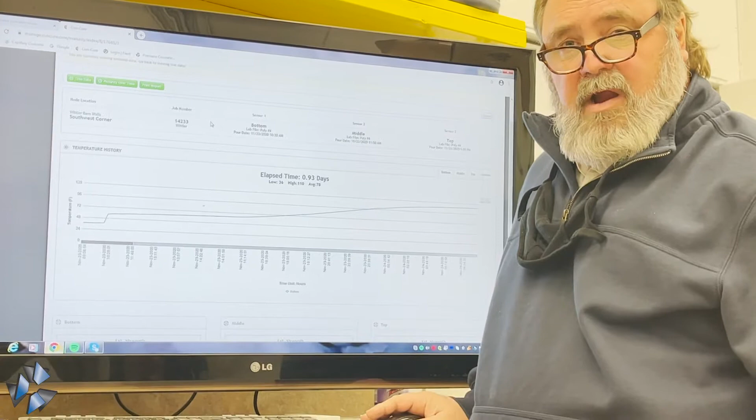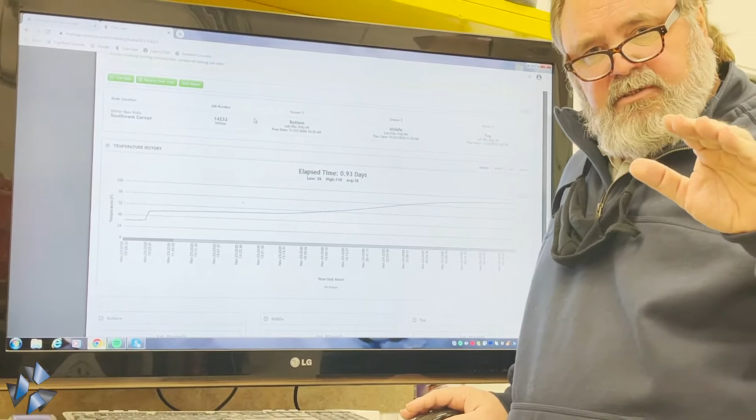Hi, welcome back. Today is the day where we break the 1-day or the 24-hour breaks, comparing what we get in the TruMatch box, which is our curing box that has a water bath in it, and it is curing the cylinders 12 miles away, mind you, at the exact same temperatures that are in the wall for the top of the wall. As you can see here, we have 3 cylinders, 3 sensors in 3 different locations.

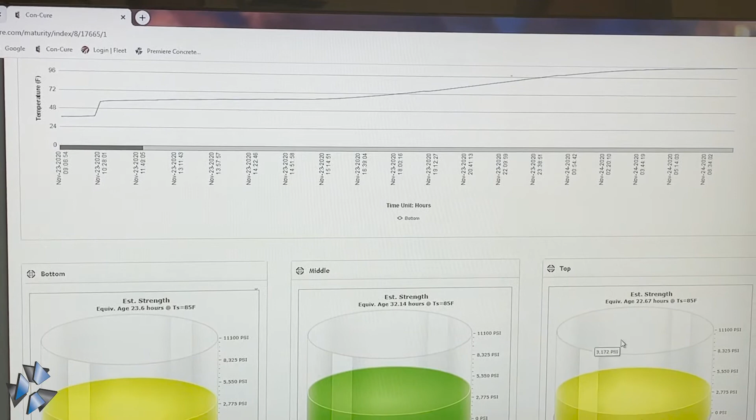We got the bottom of the wall, we got the middle of the wall, and we have the top of the wall. Now, we selected the top of the wall, as I said, to be conservative. There's 2 reasons that we picked that. Number one is that the concrete at the top of the wall is anywhere from 2 to 2.5 hours younger than the concrete at the bottom of the wall. So we know that the younger concrete is going to be the weakest.

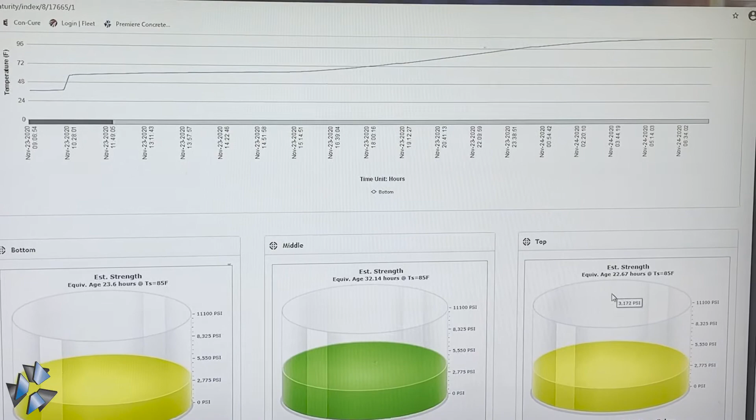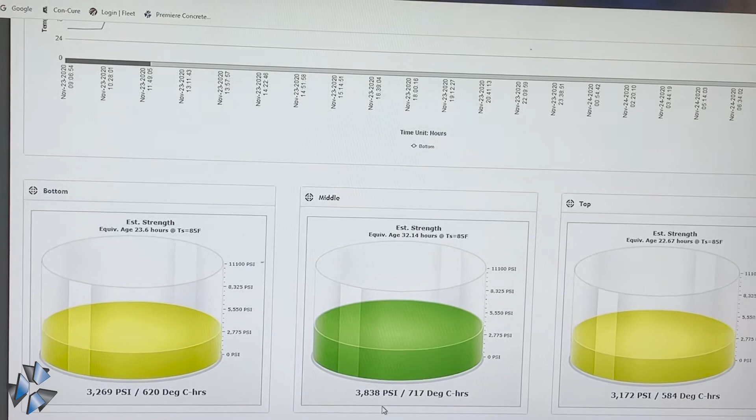The other part is that we believed that we would have the most heat loss out the top of the wall. Okay, so if you have more heat loss, you're going to have lower strengths as well. And that kind of is indicative if you look right here in the middle of the wall. You see our cylinder's green, which means we've already reached our design strength, as predicted by the maturity curve. The maturity curve estimates that part of the wall is going to be 3833 or 3838. The reason for that is because currently this section of the wall is curing at 128 degrees. So kind of interesting stuff.

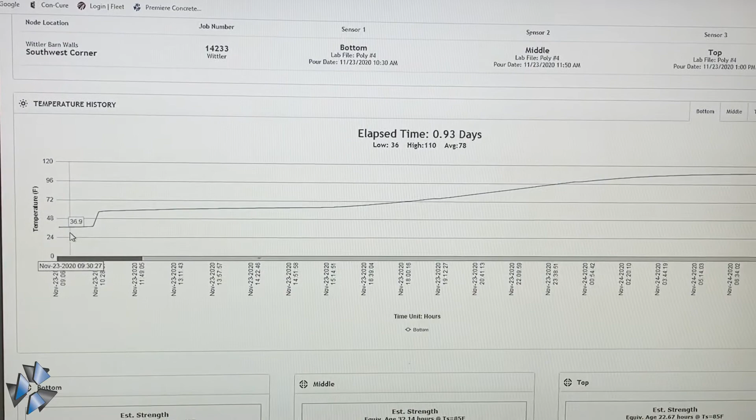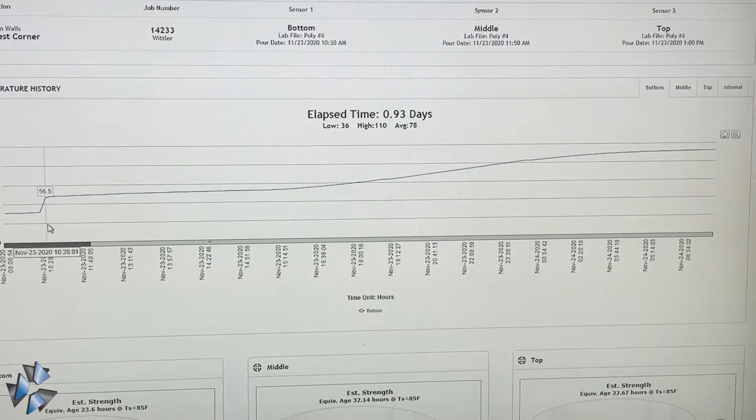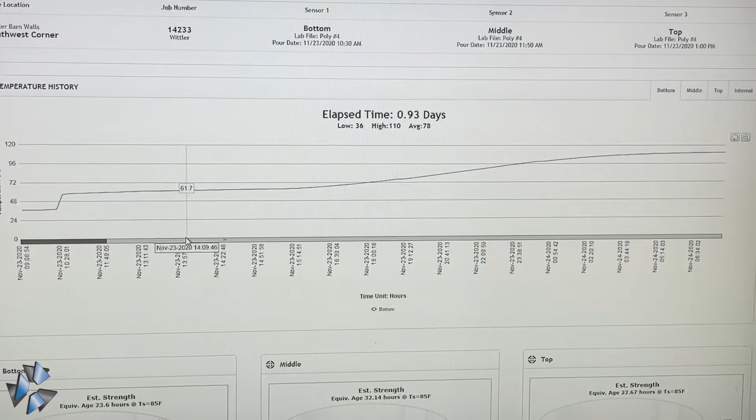But if you go up here to the top, this curve shows the history of the pour in a way. The temperature inside that form, because the probes were already set there, was 37 degrees prior to the concrete coming in. When the concrete hit the probe, it hit it at 56.5 degrees. That was our mix temperature when it arrived on the site. Throughout the course of the day, that temperature continued to increase all the way to the point where right now we're at 110.1 degrees. So that's your thermal curve.

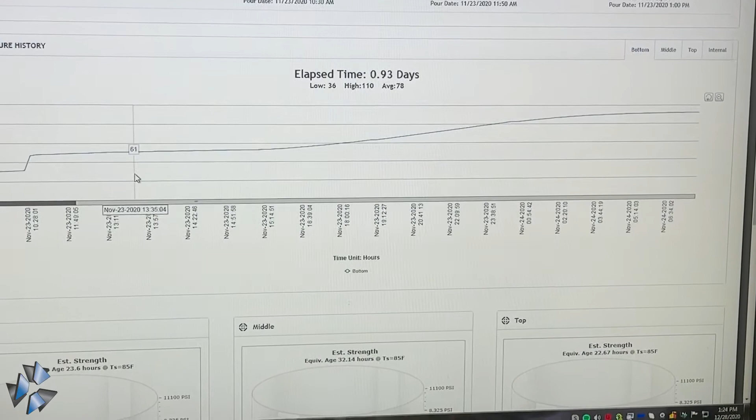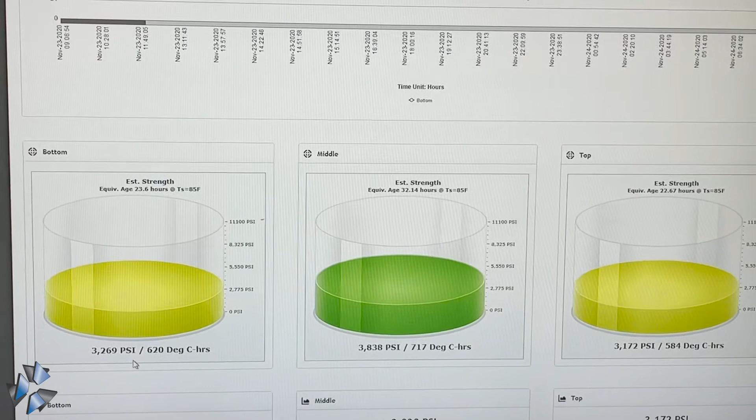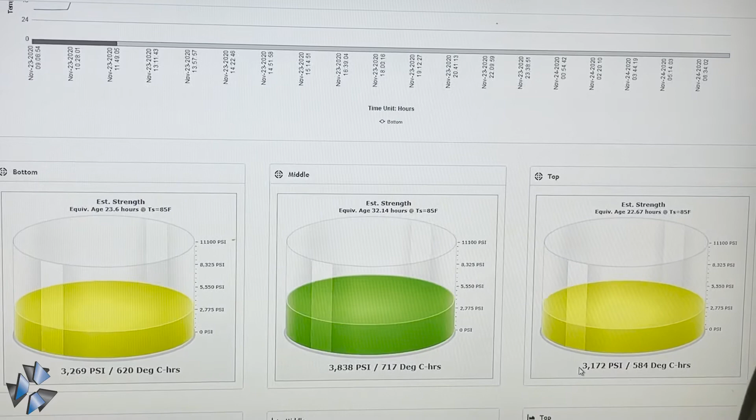But what we're going to do now is, if we look here, you got 3 different temperatures. What the maturity system is doing now is estimating the strengths of those 3 levels. The bottom level is now at 3269. The middle level is already above our design strength of 3500. That's why this cylinder reflects as green in color. Green, you're good to go. Yellow means that you're within about 10% of your desired strength. And then if these cylinders were red, you got a little while to go before you even need to watch them more closely.

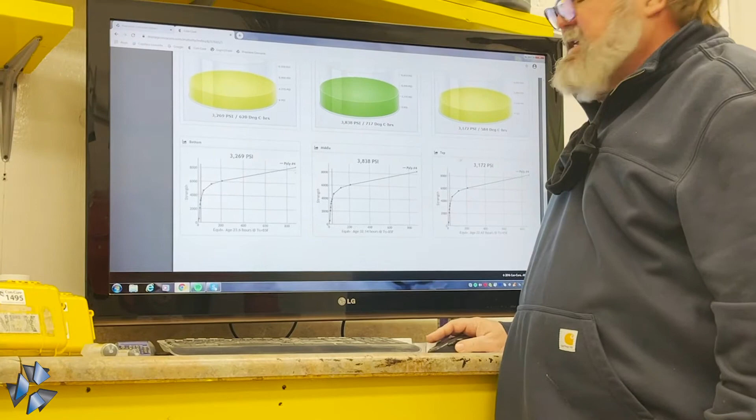So we're going to check and see how close this 3172 is to what the actual tests are. So Chris is going to break the cylinder now, and we'll compare it. Go ahead, Chris. In the interest of time, after he's done breaking this, we're also going to break the plywood box curing box cylinders, and we're going to break the one in the temperature control box. And we'll compare them to what the actual concrete is.

And part of the experiment for that is to show that most cylinders cured in the field, despite what kind of cure box you use, are not accurate. They don't reflect the true strength of what the wall is or what the structure that you're using is. So the question becomes, why are we still using it? At this point in time, shouldn't we be looking at advancing ourselves? Because technology has advanced, why can't we change some of the rules?

A lot of ready-mix producers out there pay a large price sometimes for what appears to be low-strength cylinders that come out of these types of boxes, especially in the wintertime. And there's no reason for these ready-mix producers to be paying a price for that anymore when you have the ability to see what the exact in-place strength is. And that's one of the things that's really important, something I want everybody to consider, because there are unnecessary claims sometimes that occur because we're using equipment that's not efficient enough to do the job in giving us the answers that we're really looking for.